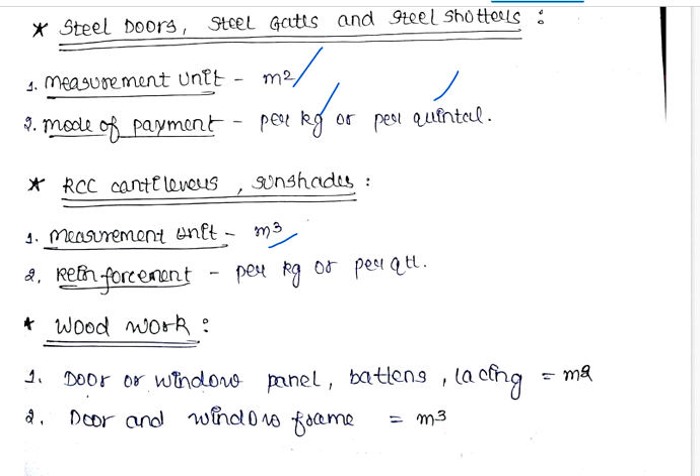After that, the grouting of the crack. So what do you mean by grouting? Grouting is actually a type of slurry, okay. If you mix some amount of cement and some amount of water, you will find a liquid type slurry, okay. So this slurry will be filled in the cracks, okay.

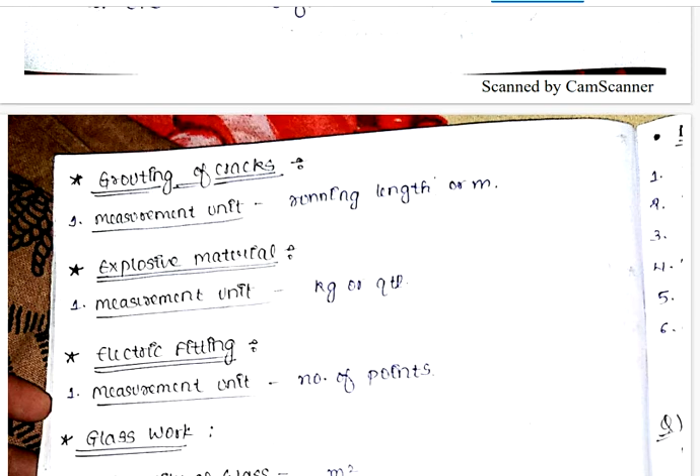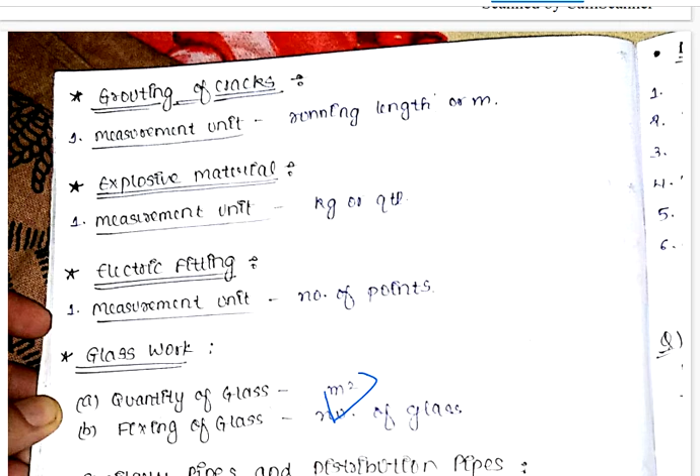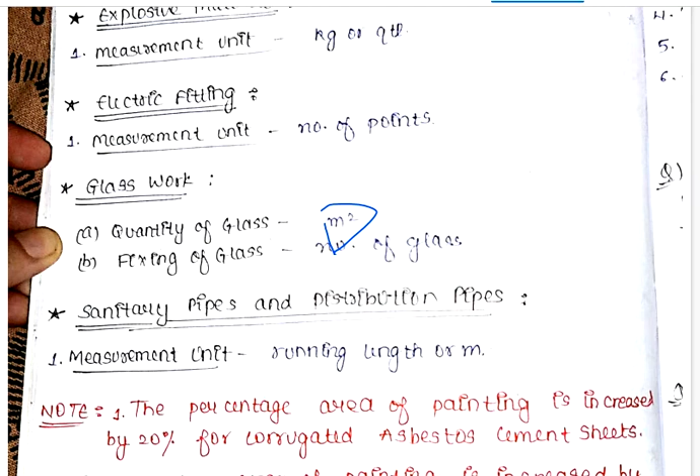Measured in meter, okay. You should remember that point, because that point is very important for the calculation of any estimation, okay. This should be remembered.

So percentage of area, first one, percentage of area of painting is increased by 20% for corrugated asbestos cement sheets. What is the corrugated asbestos cement sheet? What do you mean by that? This is actually the material. Asbestos is a material, okay, like a cement.

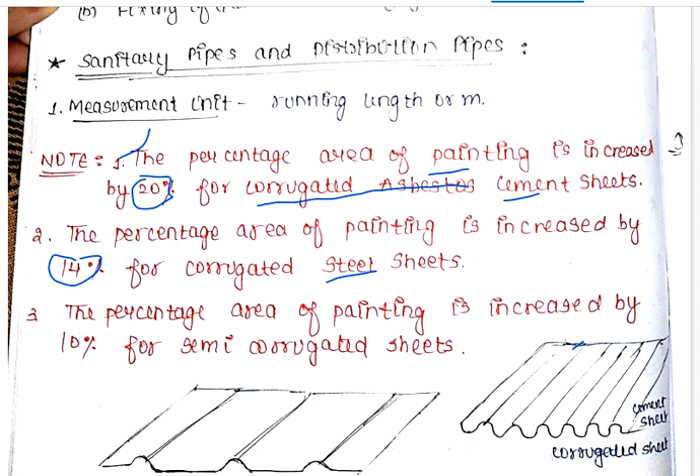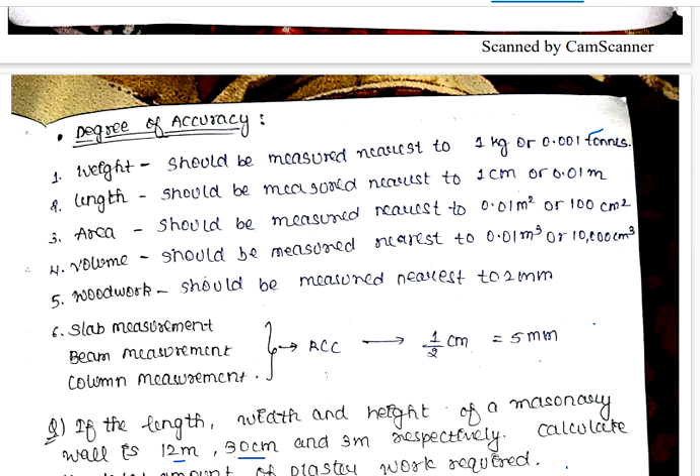You can see. And degree of accuracy, what do you mean by the degree of accuracy? First of all, what the degree means is what you want to increase and decrease in your measurement. Let's suppose your accurate length is 5 meter, okay. When you measure the length, you will find 5 point something, okay.

Like that, 5.01 meter. So there will not be any big issue, because this length will be allowed for measurement, okay. You can see in point number 2, length should be measured nearest to 1 centimeter or 0.01 meter actually, okay. So the accuracy for the weight should be measured nearest to 1 kg or 0.001 tons.

Area, what do you mean by area? The accuracy in the area will be 0.01 meter square or 100 centimeter square. If you got the higher area like that, 0.01 meter square, okay, this is the extra area या फिर this is your error in the measurement. So no issue, it's not a big issue, you can take it safely.

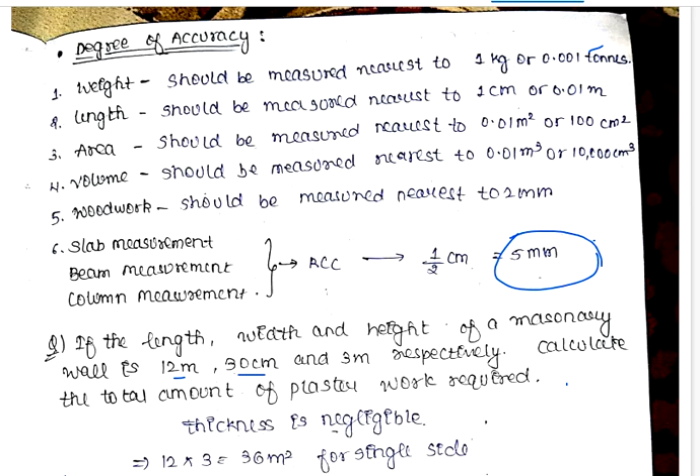So for volume, you can take 0.01 meter cube tolerance. For woodwork you can take 2 mm. For slab measurement, up to 5 mm you can take. So this one is a numerical based on that type of statement.

First of all, see a statement: if the length, width and height of a masonry wall is 12 meter, 30 centimeter and 3 meter respectively, calculate the total amount of plaster work required.

Basically, we want to calculate the plaster work here. What is the area for plaster work? We will do the plaster on that area. You have the dimension of the wall in this statement, so you will be able to calculate the area of the surface. First of all, just ignore the thickness of the wall, because thickness is not necessary for the calculation of area. If you want to do the plaster of any wall, you take only the surface area.

So 12 into 3 is equal to 36 meter square for a single side. 12 is the length and 3 is the height, so length into height gives you the area. So this one is 36, and total plaster work is for two sides, so multiply by 2, and you will find 72 meter square.

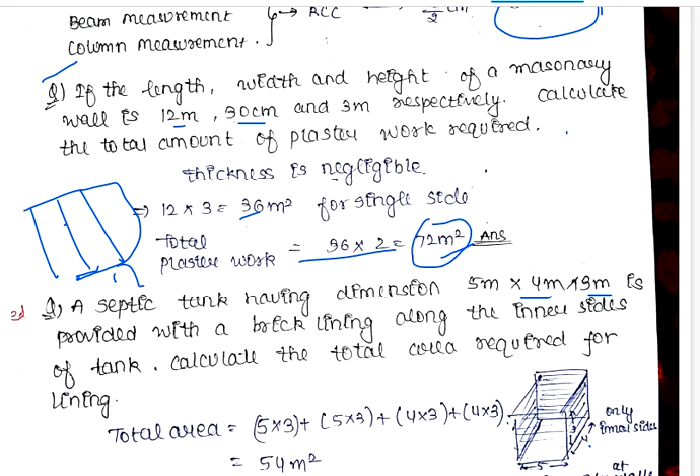Now come to the second numerical, see statement.

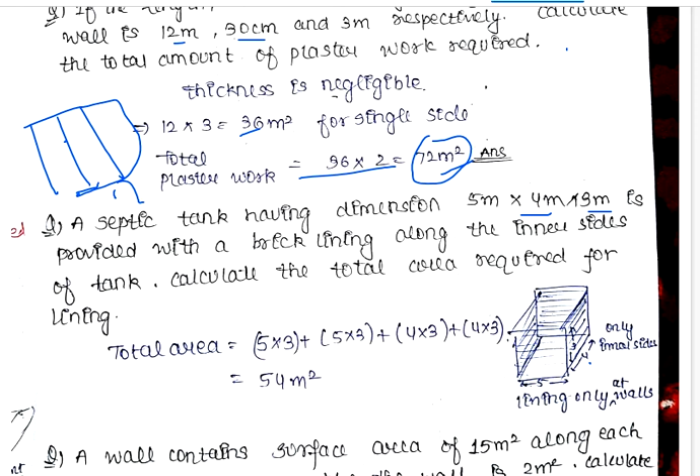So first of all, you will calculate the required material for 1 meter, then you will multiply by 72, so you will find the material, the total amount of material you need actually on the site.

So first of all, see here: a septic tank having dimension 5 into 4 into 3 meter is provided with a brick lining along the inner side of the tank. Calculate the total area required for lining. So what do you mean by that?

It means you have a septic tank, and you want inner lining of that type of tank. See in this diagram, you have a width 5 meter and this one is 4 meter, the height is 3 meter, and you want to do lining on the inner side of the septic tank.

So first of all, calculate the area of the wall. You have 4 walls actually, 2 walls of 5 meter width and 2 walls of 4 meter width. So total area you will find is 54 meter square. 5 into 3 for this wall, both will be added, similarly for the 4 meter wall, this wall plus this wall.

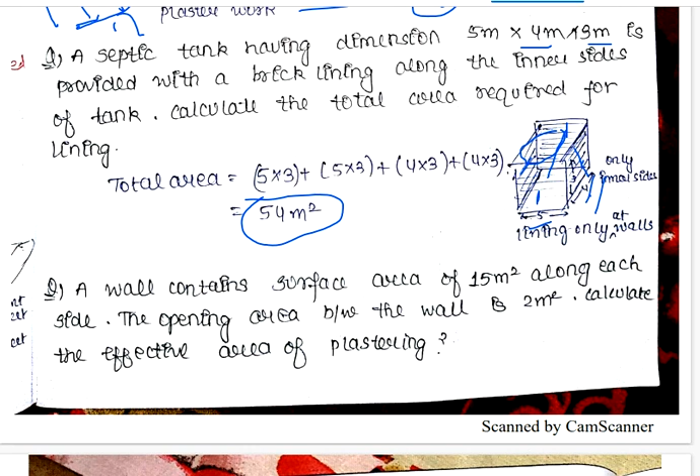Next one is the statement: a wall contains a surface area of 15 meter square along each side. Each means outer and inner side. The opening area between the wall is 2 meter square. Calculate the effective area. So here there will be an opening actually.

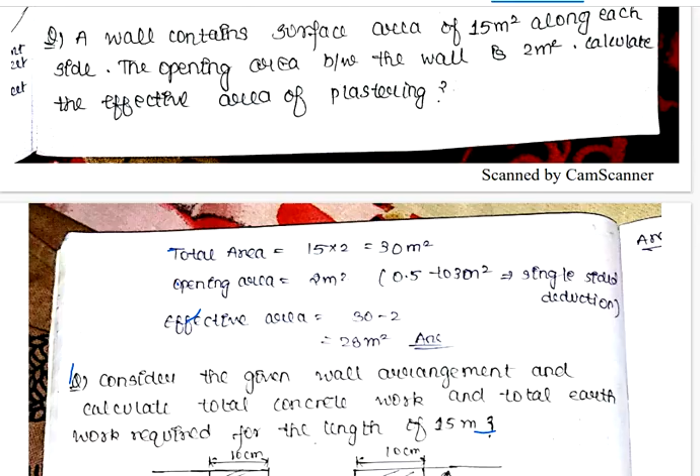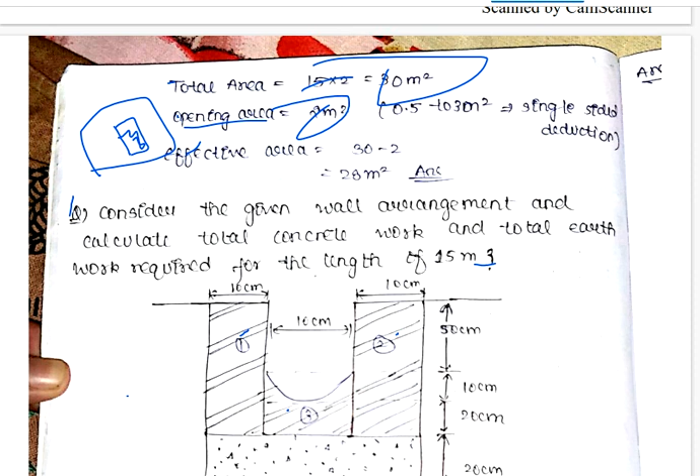Opening, what do you mean by opening? If you have a wall and you install a window, that is the opening in the wall. So total area is 15 into 2, that is 30 for both sides, and the opening is 2 meter square. So you will deduct from 30 minus 2, and you will find 28 meter square.

Consider the given wall arrangement and calculate total concrete work and total earthwork required for the length of 15 meter. This is an important question. So length is given as 15.